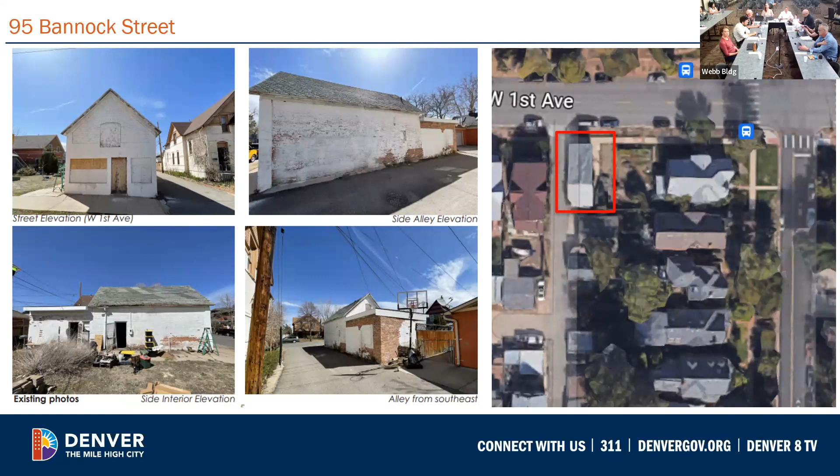All right, I will call the public commentary in order. The project before us today is 2023-LNDEMO-104 at 95 Bannock Street in the Baker District, and our staff person is Brittany.

Sorry. So our first item is total demolition of an accessory structure at 95 Bannock Street. You can see the property in question outlined in red. It is an accessory structure to 95 Bannock Street, and this structure does face onto West First Avenue.

Staff did feel that this structure had some historical significance, so we posted public notice of this demolition request on the property. The property was publicly noticed for demolition.

The accessory structure to the rear of 95 Bannock Street was originally constructed prior to 1893, as shown in the Denver Sanborn maps. By 1902, the structure was addressed 2020 Cherokee Street; however, the map does not note the building use. The 1911 city registry notes that the structure was used as a grocery store that was eventually converted into a clothing manufacturer use. By 1929, the Sanborn maps record the structure as a dwelling unit with a one-story attached garage, which is the current footprint base today.

The structure does encroach into the right-of-way along West First Avenue and the alley behind Bannock Street, as you can see in this aerial image here. The encroachment into the right-of-way is 8 3/8 of an inch along First Avenue and 3 1/2 inch into the right-of-way along the alley.

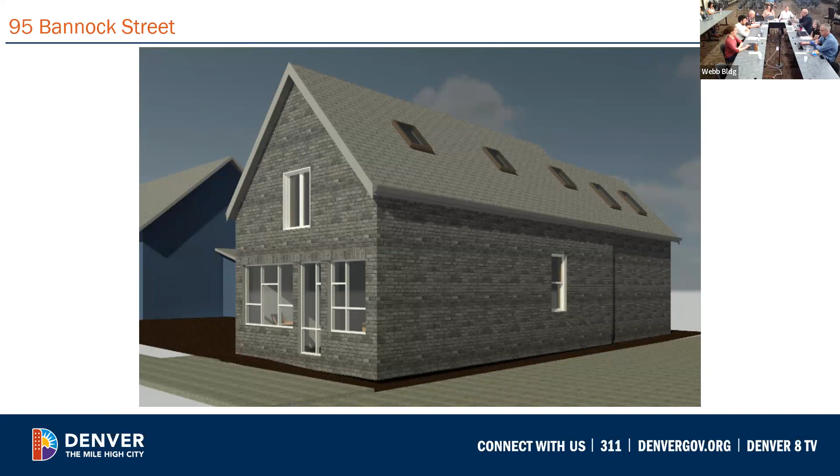So our first project today is for a new tandem house behind 95 Bannock Street. The new tandem house will have a footprint of 19 feet 3/4 inch by 44 feet and a total height of 21 feet 9 5/8 inch.

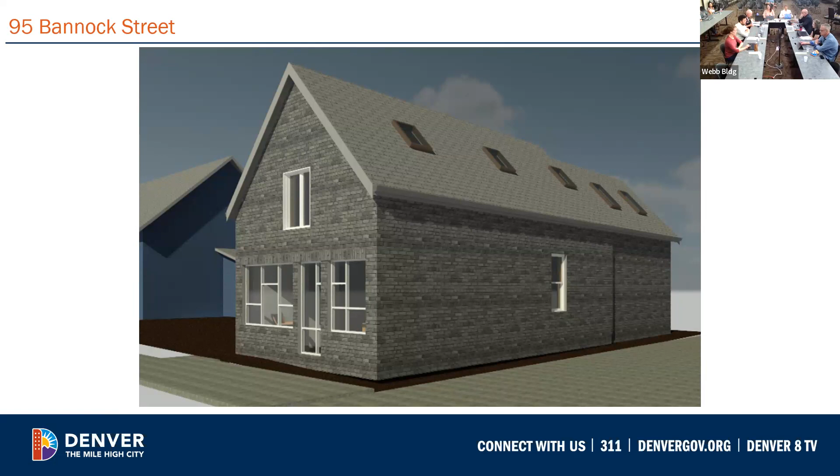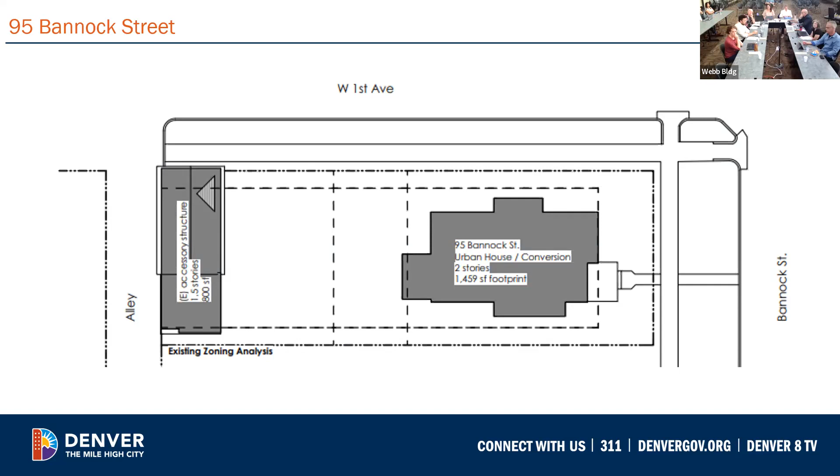So here is the proposed project. In terms of placement on the site, the new tandem house will comply with the required setbacks, so it will move the proposed tandem house out of the public right of way along West First Avenue and the alley.

So here you can see the proposed relationship of the primary structure to the new tandem house. This is the new tandem house here. The prior one was the previous site plan, so you can see how it will shift on the site. It is subordinate to the primary structure in terms of footprint. The existing home has a footprint of 1,459 square feet, and the proposed tandem house is 804 square feet.

So in terms of how the massing will shift on this site, the applicant has provided this very handy graphic. The new tandem house will be 1 foot 6 inches taller than the existing structure. It will move 3 feet 8 inches to the east. It will be minimally wider by 1 foot 6 inches. It will move back from West First Avenue 1 foot 8 inches, and then it will be 3 feet 6 inches shorter. So a pretty similar footprint, however, shifting the proposed structure on the site to comply with the required setbacks and current code regulations.

So the proposed structure will be a tandem house. It does have a living space on the ground floor with a bedroom and bathroom, as you can see here in this proposed footprint. The proposed footprint is somewhat similar to the existing footprint of the original structure that was just approved for demolition, because again, the applicant is trying to honor the memory of the prior structure. On the second level, there will be 2 bedrooms and 2 bathrooms, and then the roof will be a gable roof with a dormer on the east facade at the rear of the structure, and then skylights to provide lighting into the upper floors.

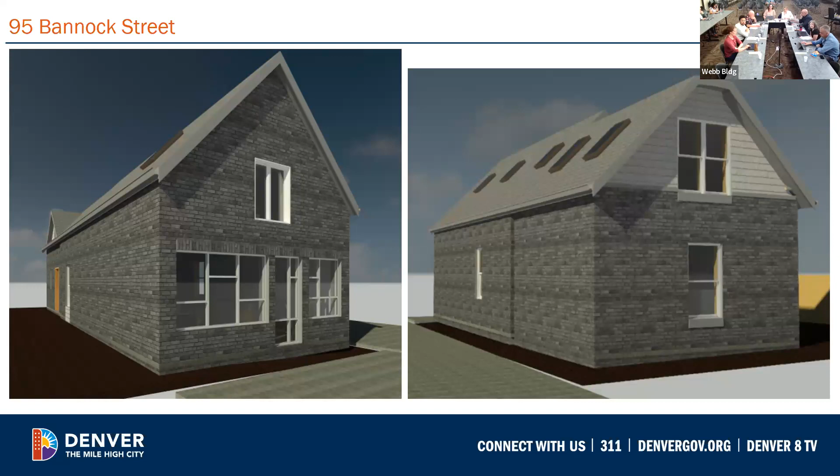So here are the proposed renderings. We will look at the phase 2 design details at a later stage, but we do believe that the structure will be clad entirely in brick, and we will look at what is in those specific openings at a later phase. Generally speaking, staff feel that the mass, scale, and form is appropriate for the Baker Historic District and is recommending approval of phase 1.

Brittany, thank you. Commissioners, any questions for Brittany? At this stage, okay, great.

All right, our applicants, Ozzy and Andrew, you're familiar with the game. Join us when you are able. There you are, say hi. Hello again. Ozi Friedrich, 528 West First Avenue with Radix Design.

So I think first I should clarify the situation with the zoning and the setbacks in the proposed design. The proposed design will include a setback encroachment on the First Avenue side, which, I want to call it the front, but since it's a tandem house building form, it's technically the side setback. And I expect we're probably going to be going to the zoning board of adjustment also, because I believe a tandem house is usually supposed to have its own off-street parking spot, which is not a part of this proposal and would not be appropriate in terms of the site layout and the history of the neighborhood.

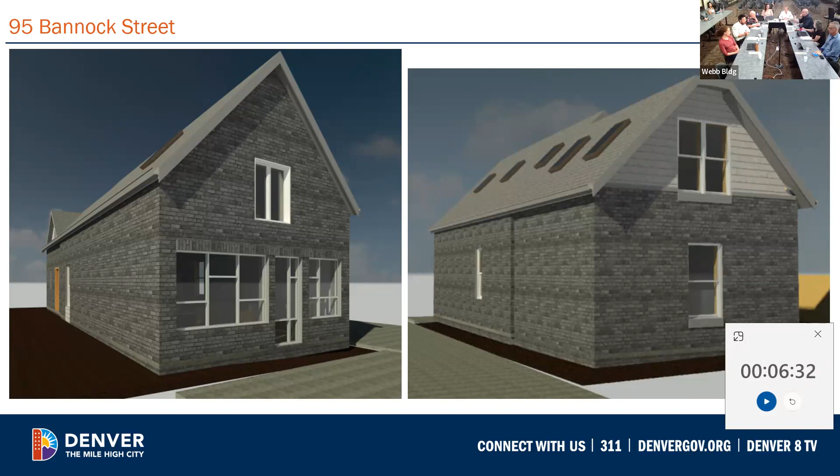Thank you. All right, gentlemen, commissioners, do you have any questions for the applicants? Just Larry, I have one question. Yeah, I'm curious with that north setback, what's the reason for having any setback at all?

That's a good question. I think we wanted to have it at least a foot off of the property line, with future sidewalk maintenance being a consideration, and if we were to look at having something like a stoop along the front of it, I think zoning would say that needs to be a foot off the property line too.

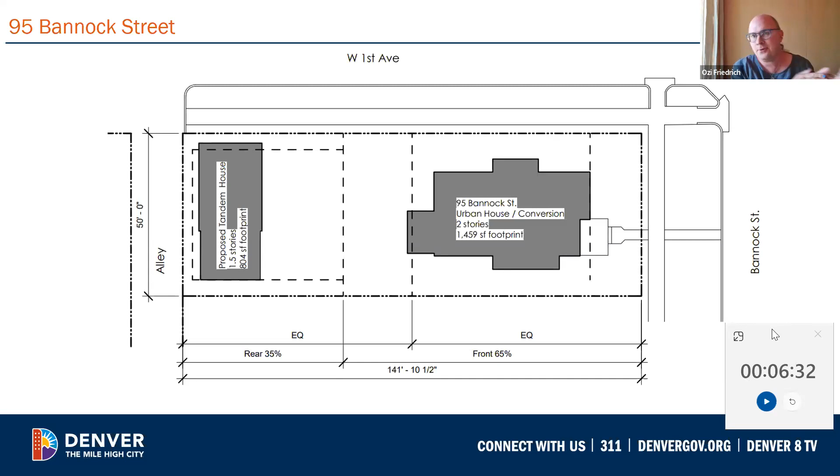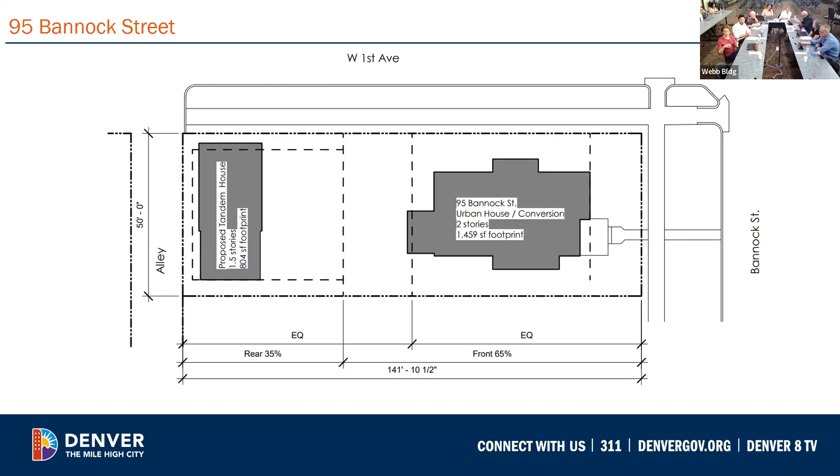Thank you. Erica has a question. With the rear portion that's evoking that original addition to the original building, I can see that the roof peak is clipped to keep it lower, and I know it's set back on the sides, but is the roof plane one continuous plane from front to back?

Yes, the proposal is that the 45-degree sloping roof planes are continuous front to back. I think the idea here is to express some subordination between the part that's recalling the original front and the part that's more like the original addition.

We looked at doing a full step down at the roof there, but the ceiling height upstairs is quite limited. So if you were to step down there and have enough of an offset for waterproofing, there's not enough height left for it to be an inhabitable space. So the clipped roof is kind of the gesture of subordination there, along with the inward step. Thank you.

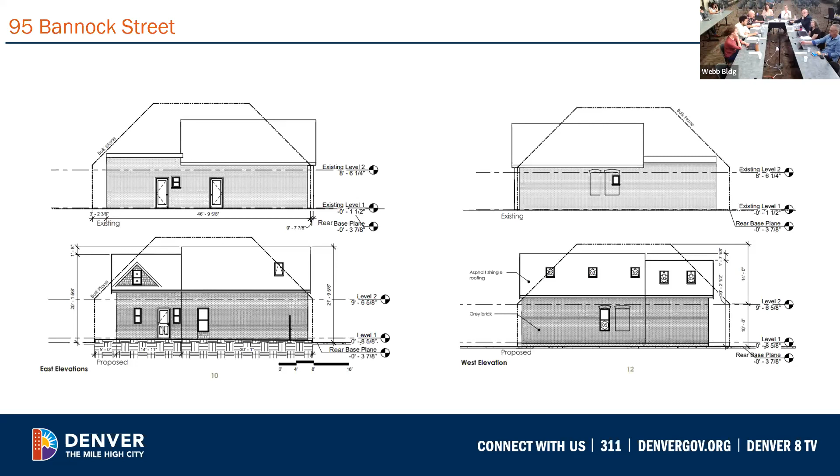Anybody else? Candace? I have a question about moving the front door. So on East First Avenue, are there other residential dwellings that have front doors on First Avenue?

I think the most typical pattern in the neighborhood is that the front door faces the street. There are examples of other properties in the historic district where the entry was moved to the side at a point in the structure's history. I can think of one in particular right now, though I'm not remembering its address.

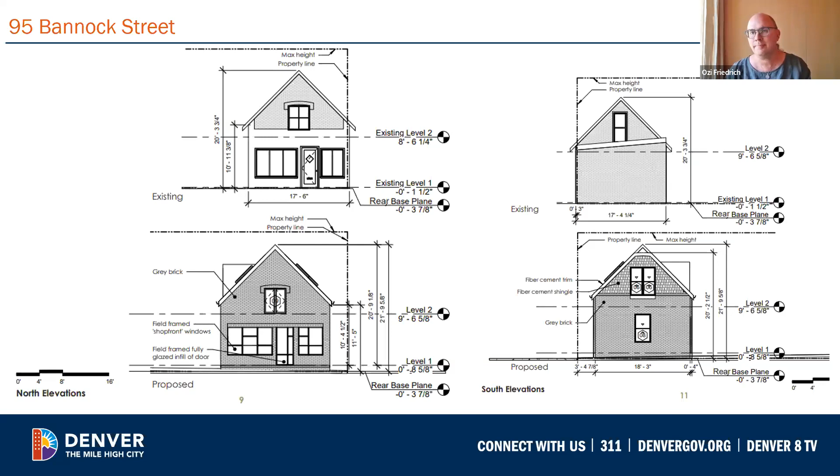Thank you. Okay, anybody else? All right, gentlemen, thank you very much. We'll move on to see if there are any people from the public that have questions.

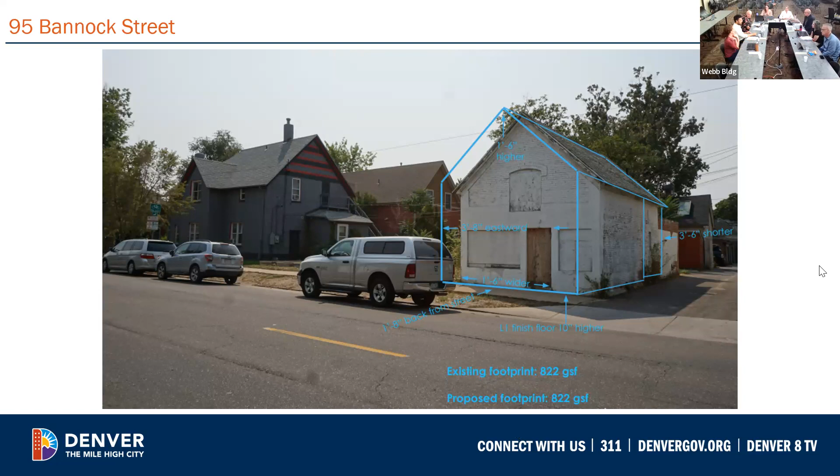That makes sense. I would just like to insert, though, that I would hate to see that window opening be shortened, or have two big picture windows on that facade. I think that would be detrimental to the rhythm of openings we're talking about here. So while I understand the oddity of the window/door, I think, at least in this context, it invites the question of why is that there — there's a story behind this, and what is that story? I feel like it at least invites some rumination about that, rather than just another new little house that looks different than the surrounding houses. It's better than a freaking doorway.

I think, as I understand the applicant's strategy, the pattern being followed is the historic building that was on site, and particularly the street facing openings are reflecting what was there. Otherwise, we would be comparing it to that set of houses on the other side of the alley in terms of context and pattern. But this seems like a very appropriate interpretation of the historic development pattern of the neighborhood.

So the thing that slightly compounds it for me is where the real front door is tucked way back onto the side of the site. It's not even on the alley side. It's a little bit odd because this is a structure on a main street where you can't really tell how you get into it, because the entrance is way in the back. That seems like not a typical organization of a little house like this.

You should see the house and see the entrance. So, maybe this is just a friendly comment, but the door—it took me a long time to figure out where it was, because I expected to find it at least on the alley side or somewhere visible from the right of way. Going back to guideline 4.2, it's an unusual organization of elements from what I can see in the neighborhood. I agree with the visibility of the front door concern.

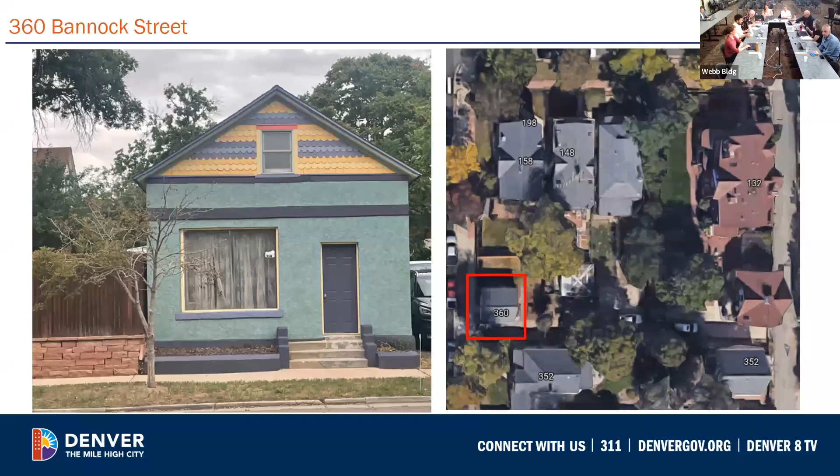The applicants will be working through staff person. Thank you very much. And now we are on to our next design review, which is also in the Baker District: 2023-COA-206 at 360 Bannock Street. And again...

So this is a tandem house conversion. This is an existing structure. We are not going to review this through the two-step process because it is an existing structure—they're simply changing the use and adding an addition to this. So while we typically review tandem houses through the two-step process, this is more a use adjustment to comply with the Denver zoning code, as this structure is on its own parcel, and you cannot have an accessory structure accessory to something when it's on its own parcel. Hope that all makes sense. But this will be a tandem house.

There are minimal changes proposed to the existing structure. The non-historic windows and doors will be replaced, and the majority of the structure will remain intact.

You can see this structure here on the aerial image. It is on its own parcel, which roughly matches the outline shown here. This is on Bannock Street and fronts onto Bannock Street, just up the street from the structure we just reviewed.

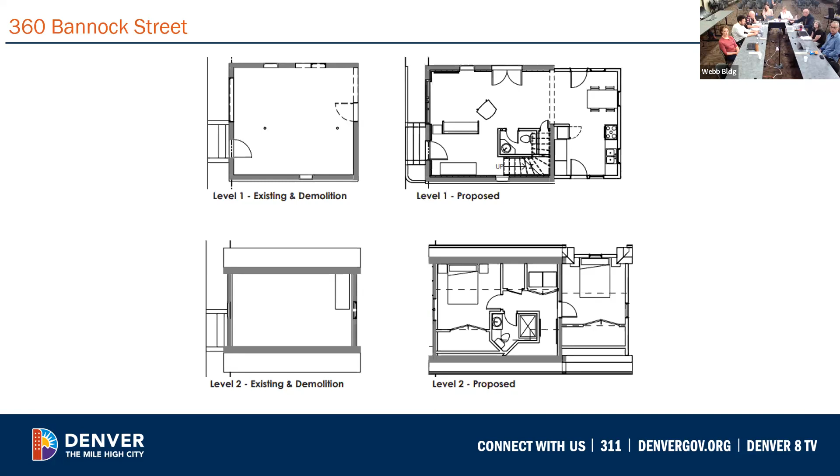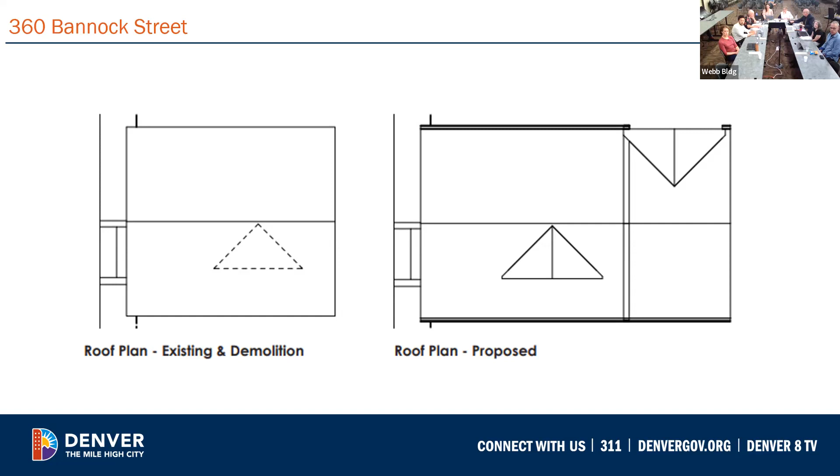To accommodate the change in use, the applicant is proposing a new dormer on the south roof slope, and the new addition will also have a forward-facing gable, similar to what we saw in the last project.

To add some use to this structure, the applicant is proposing to replace the non-historic plate glass window with a new framed glazing that will have the appearance of a double hung window, but it will be a single framed glazing unit giving the appearance of 3 double hung windows within that opening. Staff feel that is appropriate because, similar to the last structure, this structure has had a history of change of uses from residential to commercial and back to residential, so this preserves some of that history.

The existing front door will remain oriented towards Bannock Street. However, the non-historic door will be replaced with a new full lite door with 2 panels below, similar to doors seen within the Baker Historic District. In the gable face, a larger window will be installed to provide egress, and that window does have a double appearance.

At the rear, that new addition will be a gable on side gable addition, which you can see in this elevation here. So the biggest changes again are to the rear, as there will be a rear addition.

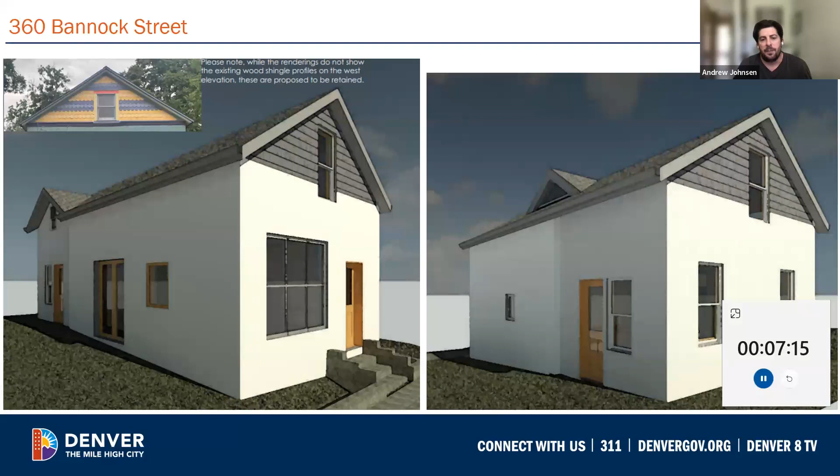And then on the south elevation, it's kind of an abandoned or vacated alley, and you won't be able to see that back entrance very clearly either. So I figured that might be important to point out.

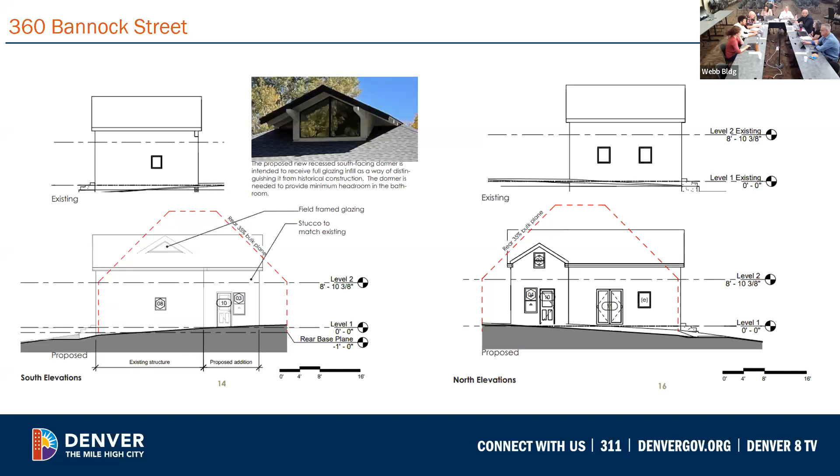I think it's a minor detail, but I think it's one that would help make the addition read as an addition. The southwest perspective on sheet 18 shows a continuous line, and I agree. I don't necessarily think the heights need to change, but that setback I think would be helpful. I guess the question is, we pointed out a guideline, and you could argue it doesn't apply.

Architecturally, I will just say that I kind of like it the way it's presented. It is simple, a little more of a contemporary interpretation of what an expansion would be within the historic district, but in my mind, one that's acceptable.

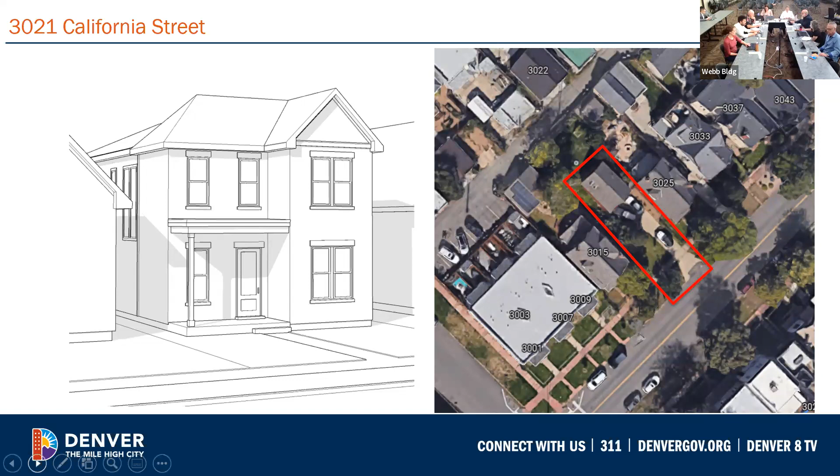So the proposed structure is for a new single-family residence with a detached garage structure. The primary structure is 2 stories in height, with a hip-on-gable roof form referencing some of the roof forms found on this block in the surrounding historic context. Initially, the applicant was proposing an Italianate structure. However, there are very few Italianate structures on this block, so staff did encourage a restudy of the form. There are about 3, including the Dr. Justina Ford House, which actually was moved onto this block, so it is not original, but we felt that to honor the history of the prior structure and the development patterns, a different roof form would be more appropriate. The detached garage is just a simple hipped roof garage.

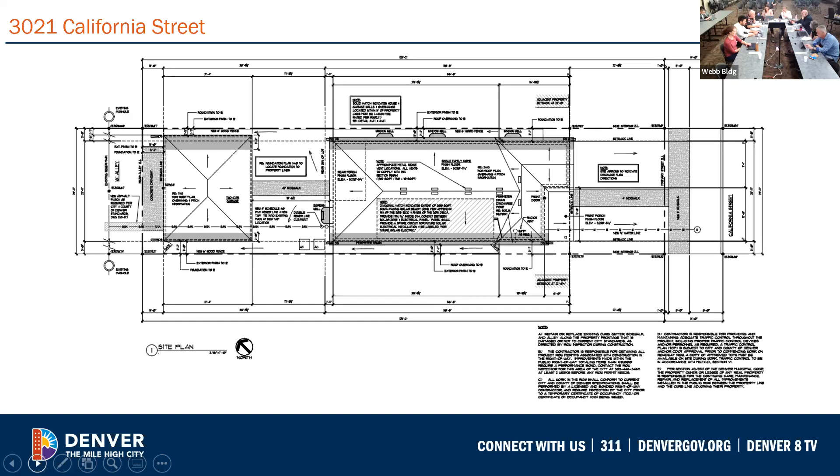The overall building footprint for this structure is 23 feet 7 inches, and it's 56 feet 2 inches deep on the lot, and it is 28 feet tall. The proposed garage is 25 feet by 21 feet and 17 feet tall.

In terms of the placement on the block, it is in alignment with the adjacent properties, which you can see here are generally setback from the public right of way. There are these structures here that have less of a setback, but generally speaking, the setback aligns with the adjacent property, and will honor that placement on the site.

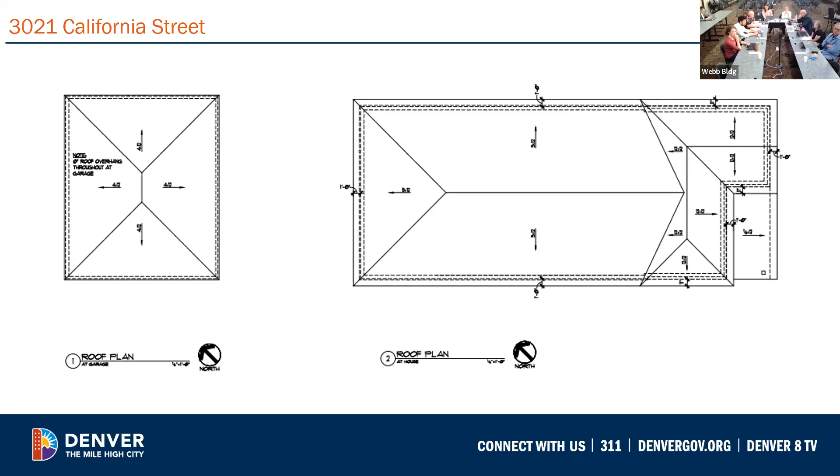Here is the proposed footprint. The structure will have a central entrance with a partial width side porch and projecting structure at the front. It will have an egress window on the front, so we will need to look at that closely in the design detail phase. It does have a basement, ground floor, and upper floor floor plan. Here is that proposed roof structure, mimicking some of the roof forms found in the surrounding historic context, which I do have images of to show you later.

So here's the proposed structure. Generally speaking, it is simple in design. The proposed structure is centered on the lot with 3 feet side interior setbacks. The proposal will have a significant amount of depth, but it is all within the front 65% of the lot, and the development is typical of the surrounding historic context.

The proposed structure will be set back from the property line and will feature a partial width porch on the south side of the facade. It is a uniform setback on this block. There is a 1.5 foot raised foundation proposed, and floor to floor heights are typical of the surrounding historic context, in which the ground floor is a little bit taller than the second floor.

Structures within the Curtis Park Historic District are generally very tall in nature and often violate the height and bulk plane for this district. This structure will again violate the bulk plane, but not the max height. The roof form was restudied by recommendation of staff, and we do feel that this roof form is appropriate, and the encroachment into the bulk plane is appropriate as well.

Here is the north elevation. The structure does have simple openings that are a little bit wider than they are tall, which is atypical of what you see with Curtis Park's tall, narrow window openings. However, as these are on secondary facades, they'll have minimal visibility. Additionally, the 2 sister houses that sit at 3015 and 3025 actually have wider windows than taller windows. They have more of a classical architectural vocabulary. So we do feel that this is fitting in with this block in terms of the window openings.

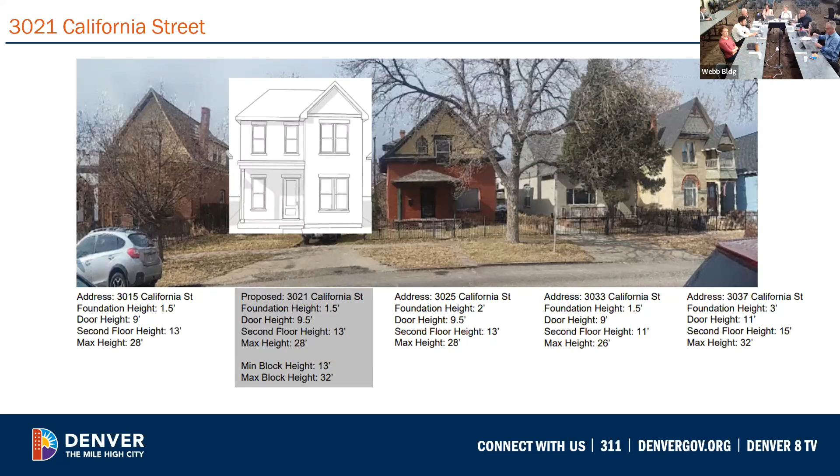Both have partial width porches located on the south side of the property and more centrally located entrances. So we do feel that there are parts of this building form that are indicating the original structure while remaining identifiable of its time, and in terms of how it fits in with the surrounding historic context.

So there are a few of these hip roofs within the Curtis Park Historic District that are truncated in nature and don't come up all the way to a full pyramidal point. They are typically one-story structures. The applicant here has put in two on Stout Street, but there are several just north of this property with this building form. And 2921 Stout Street has a similar building form, and this is a historic structure within the Curtis Park Historic District.

So while this is not a roof form that we typically see for Curtis Park, we do see a lot of Italianates in Curtis Park. We do feel that it is appropriate for the district and does contribute to the variety of development patterns that you see within Curtis Park, and it's kind of nice to see just a different roof form for Curtis Park.

So we are recommending approval of the phase 1 mass form and context for this site, as we do feel that it is compatible with the surrounding historic context, and are also recommending approval of the administrative adjustment for the bulk plane encroachment. Brittany, thank you.

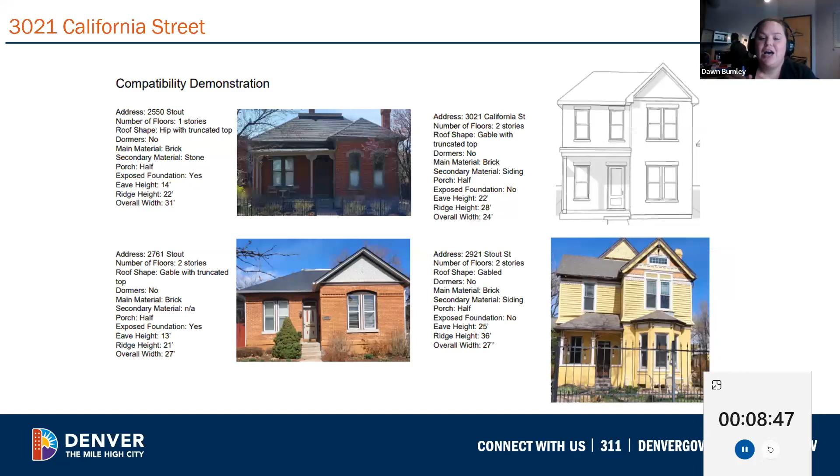As far as other details, we like that gable end on the front - we feel like it plays off some of the neighboring houses. If you look at page 20, the compatibility demonstration sheet, we felt like these neighboring residences really showed that centralized front door, the gable end at the front, splitting up the massing so it was less symmetrical, more asymmetrical, to fit in with these other neighboring structures.

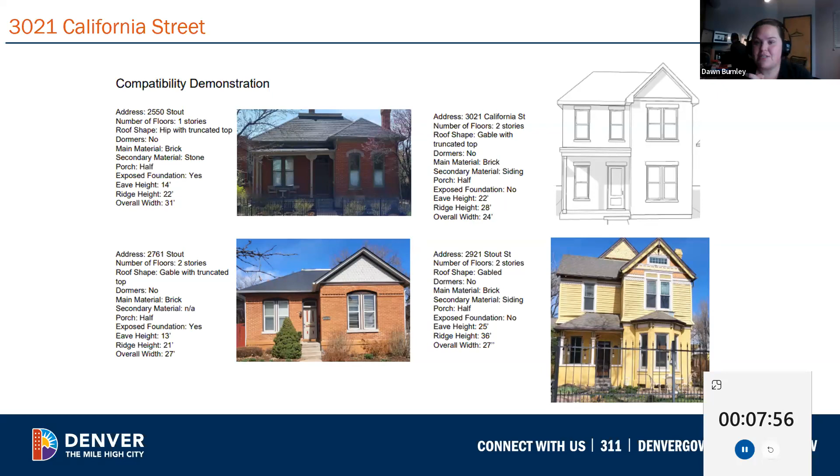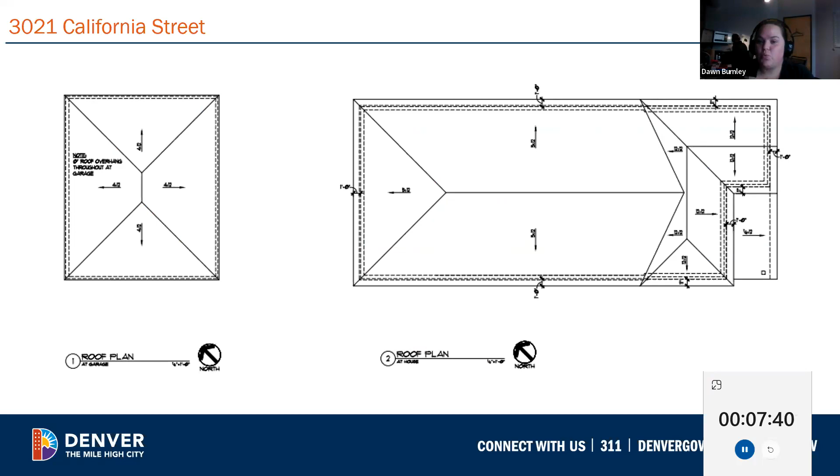So we also felt it was really important to get a little bit of a higher roof line to go with this massing form. So we have the 10-foot ceiling heights on the first floor, 9 foot on the second floor, with a 12-12 pitch there at the front. We decreased the slope of the roof in the back so that we could give this look of the steeper roof line, which seems to be more in line with that style of house. So that was important to us, and that's why we're asking for that adjustment for the 1 foot 11 inches, an additional height there at the bulk plane, but not overall.

The windows on the side of the house aren't very visible at all. From the very front facade, they start at 17 feet, 8 inches back, and from the facade where the front door is, it's still 11 feet, 8 inches back. We tried to locate them just past the break line of the brick, so it seemed like a logical point. We really don't feel like they're very visible.

The majority of the windows on the house are 2'6" by 5'6" on the second floor and 2'6" by 6 feet on the ground floor. Those two side windows are 2'6" by 9 feet, so while they are significant, they are larger, but we don't feel it's as significant as some of the larger stairway windows you see around. It would be nice to get that additional light in on that side of the house, given that this is a narrower lot.

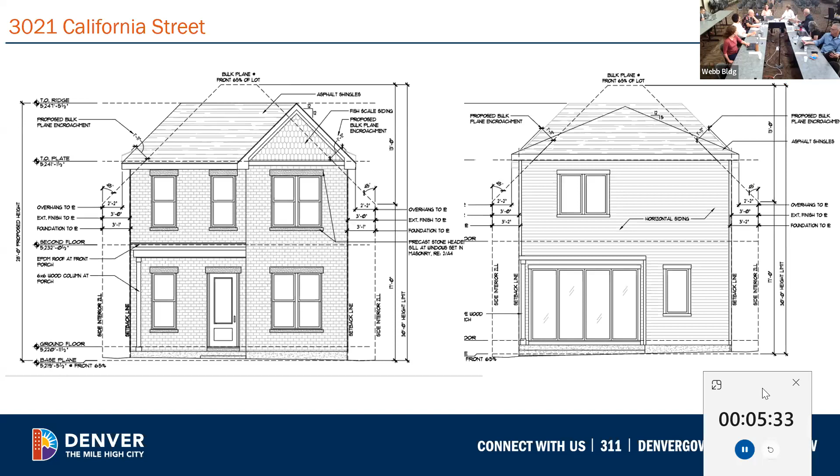Okay, great. My name's Andrew Arata, 1836 South Marion. I actually lived 3 blocks exactly from California Street. We built 9 years ago at 2725 California Street, but we've since moved down to DU, so coming back really close to where we first built.

The only comment I'm going to add is we will not have waterproofing details issues because there are several DHA lots, 2 that I know of that I walked, that have terrible waterproofing details, but we won't have them. I think I'm never going to do fluid apply and recessed windows for the siding because I have seen that leaking water issues. We don't plan on that problem.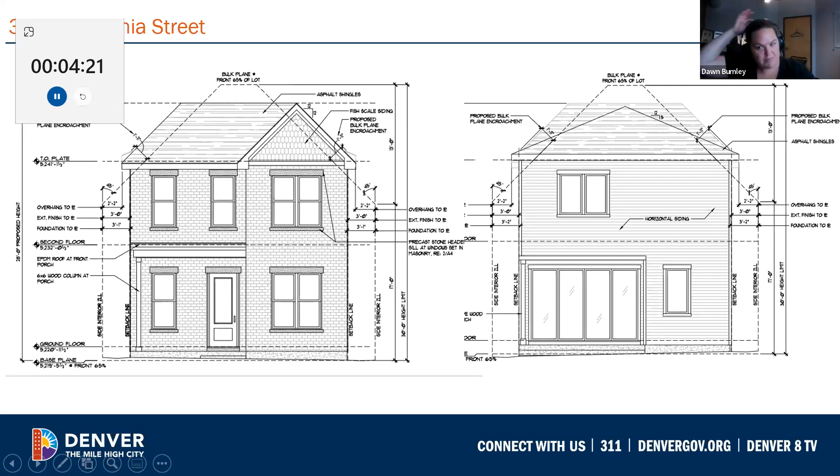Can I add one thing? I may have misheard this whenever Brittany was presenting, but I believe she said there was an egress window on the front of the house that we'd need to address. There isn't actually. There's one at the rear of the property, and then there's 3 at the side. I just wanted to point out that the one you see at the bottom of the sheet is at the back of the property, at the right back of the house.

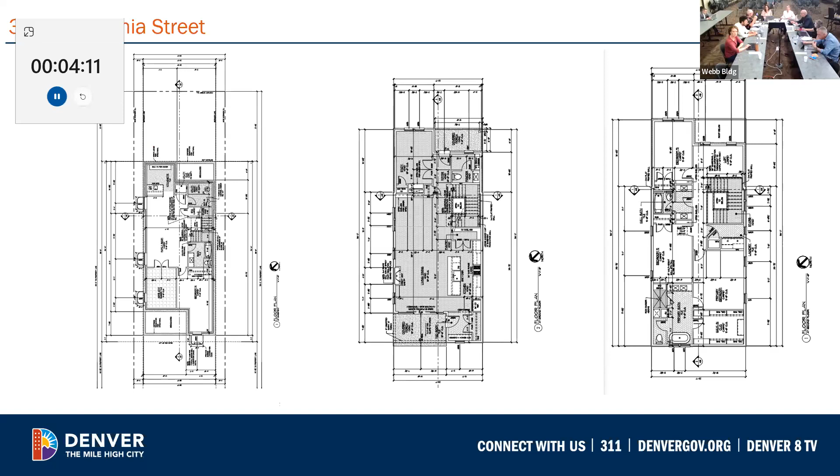All right, commissioners, do you have questions for the applicants?

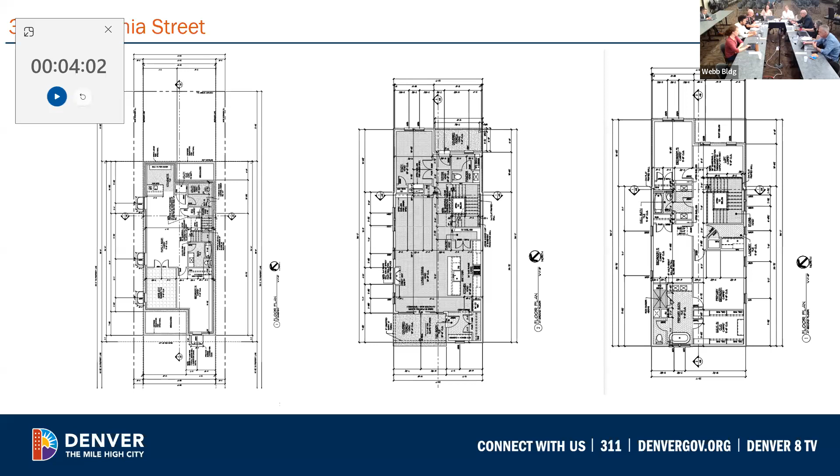Larry? No? Nick? Yeah, you talked a little bit about the stair window and its oversized proportion. I'm not the window expert on the commission, but to me, just visually, it appears more like a sliding glass door proportion than a window to an open stair proportion, and so I found it a little confusing. But that's just a comment, a question for my fellow commissioners when we go into discussion.

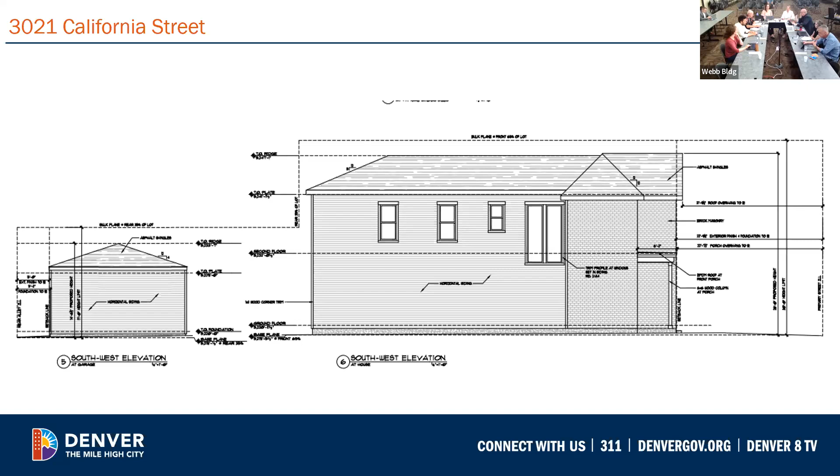Any other questions for the applicants? Okay, all righty, thank you very much. Thank you.

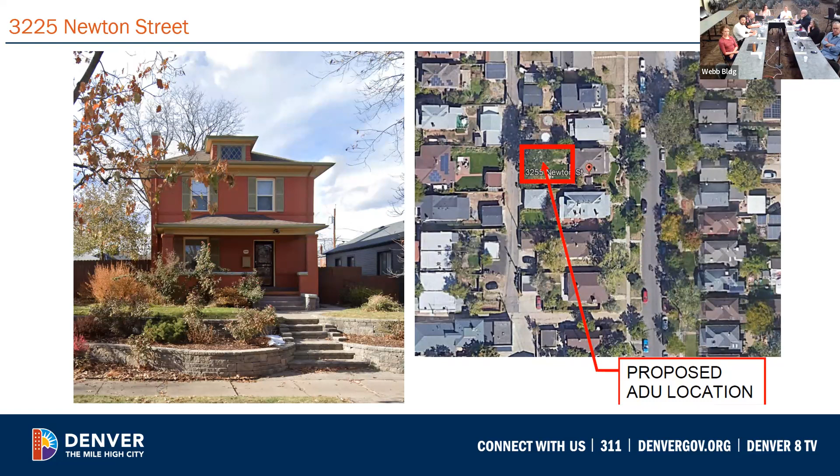The commission has reviewed an accessory dwelling unit structure at this site previously two times. The first submittal was in June of 2022, and the commission had concerns that the proposal was too much programming for the site. At the time, the applicant was proposing not to demolish the existing garage structure and instead construct a new accessory dwelling unit adjacent to the garage on the south side of the site. The commission again expressed concern over programming at the site and also the roof form of the proposed accessory dwelling unit, which was a gable roof structure.

Then in January of 2023, the applicant returned with similar programming, with the garage still intact and an accessory dwelling unit on the south side of the site. However, minor revisions had been made to the overall form to have a hipped roof form to better match the primary structure, along with some design details that felt more similar to the primary structure. Staff did actually recommend approval of that submittal. However, the commission still expressed concern over the overall form and programming for the site and ultimately denied that request.

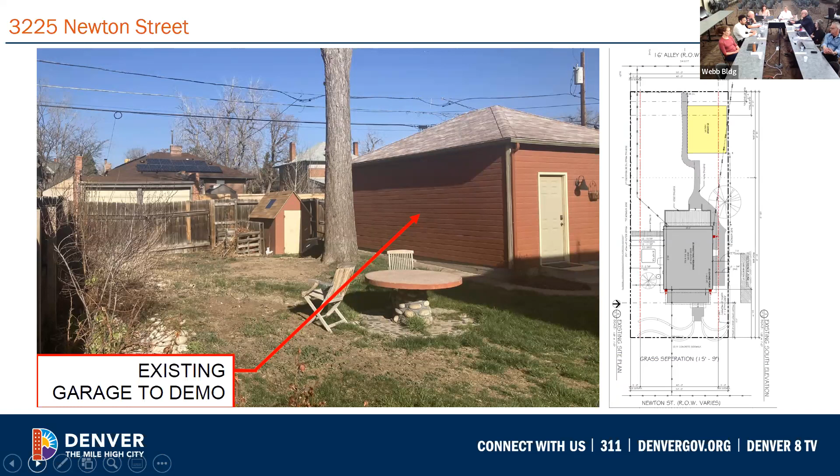So now the applicant is back with a submittal that involves demolition of this garage structure. Here is the proposed accessory dwelling unit. It will be 24 feet in height with a footprint of 25 feet 5 1/4 inches by 35 feet 5 inches. This footprint is very similar to what the commission saw previously. The major difference is the placement and orientation on the site.

This will be wide along the alley, whereas the prior submittal had significant depth along the north-south property lines. And again, that garage is now demolished, allowing much of the accessory dwelling unit massing to be placed behind the primary structure. However, some of the accessory dwelling unit will be visible on the north and south sides of the site. You can see these red lines in the site plan image showing the accessory dwelling unit alignment with the primary structure.

In terms of the footprint, the proposed accessory dwelling unit is 842 square feet, and the existing single family dwelling unit is 803 square feet. So the overall footprint is similar to what the commission saw previously.

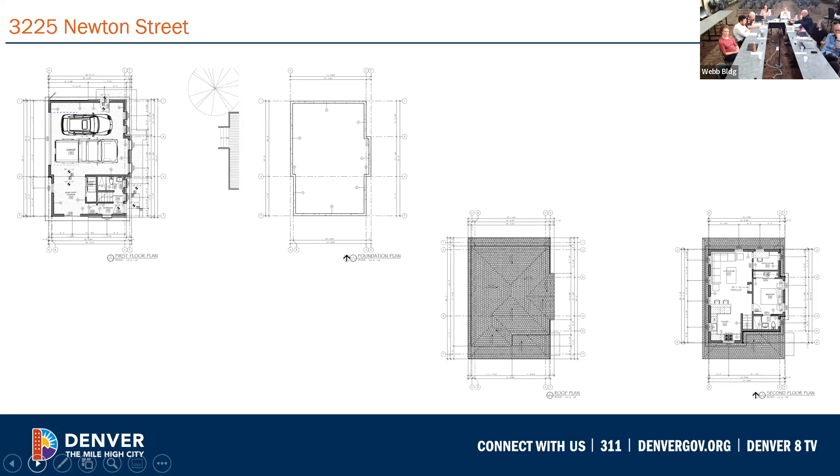That projecting gable is to accommodate a larger vehicle, as you can see in the first floor plan. The storage and entry space is limited to the ground floor. But to enlarge the kitchen a little bit more, there is a cross gable form also proposed on that hip. So again, a complex roof form as compared to the primary structure.

The applicant did simplify the roof form a bit over the porch entry to just have the one slope. But again, this is where that roof form is visible from the public right of way, and it's where this ADU has the most complexity. So staff do have some concerns over that.

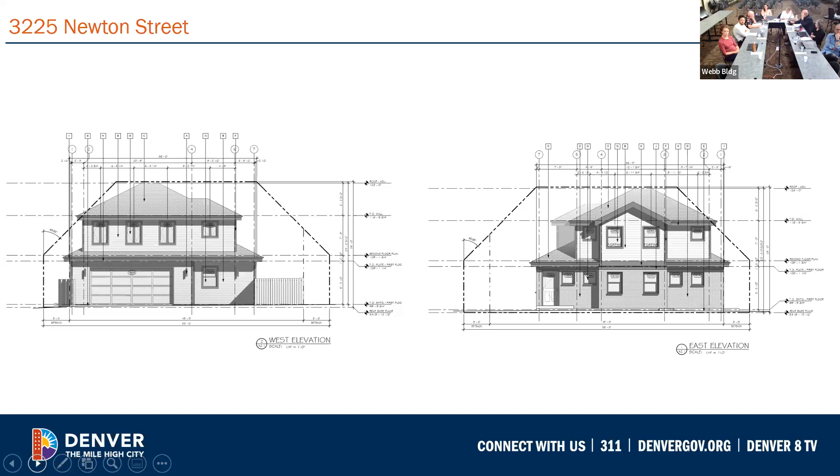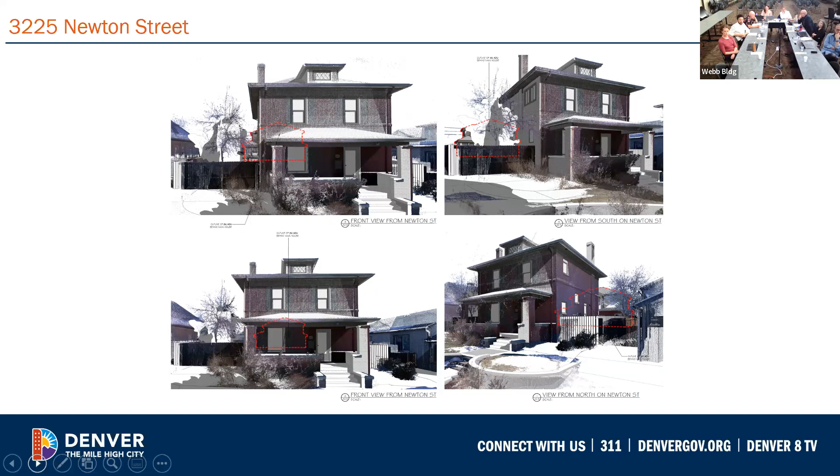As you move around the site and walk along the sidewalk, portions of the ADU will disappear behind the primary structure. However, generally speaking, staff are very concerned that this form is not appropriate for the Packards Hill Historic District and is not representative of the accessory structures you would see there.

So while we feel the applicant did make a number of improvements to this design, the overall form is not contextual to the Packards Hill Historic District, and therefore we are recommending denial of the submittal at this time. Just because we have concerns over its relationship to the primary structure, the surrounding historic context, and the overall programming of the structure and how that affects the exterior expression of the structure.

Thank you, Brittany. Commissioners, do you have any questions?

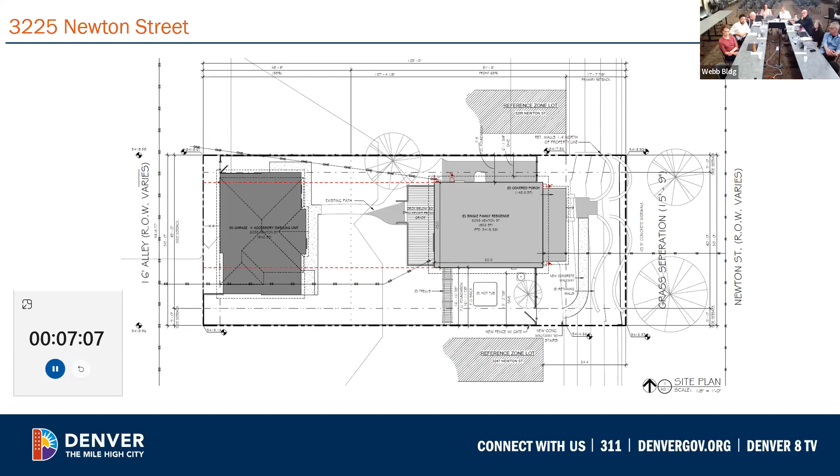Also, the entrance to the ADU is within that single story, which is in context and part of the guidelines in terms of having that face the main street. The ADU's proposed height is below the max height for zoning and is 3 feet lower than the existing primary home, making the ADU subordinate in height. The location of the ADU maintains open space in the backyard, consistent with neighborhood building placements, as well as extra space along the south side.

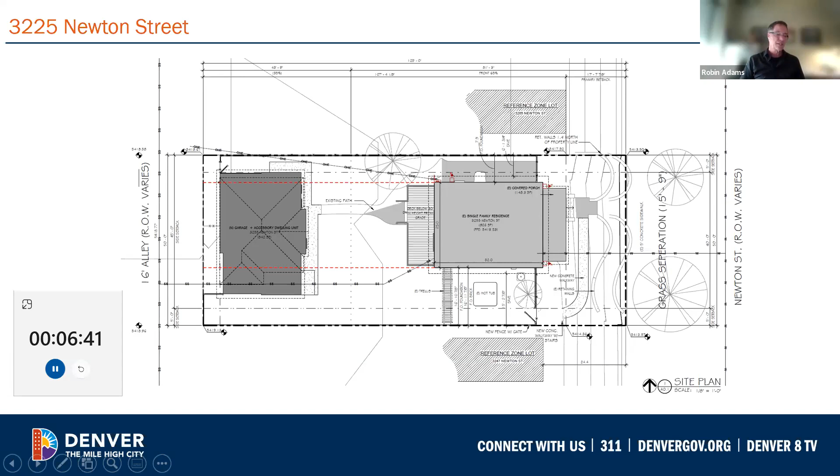So we feel we're preserving that character of open space and open land. Overall, the footprint of our ADU is 842 square feet. The house, if you include the porch, is actually 951 square feet. The porch itself is 148 square feet.

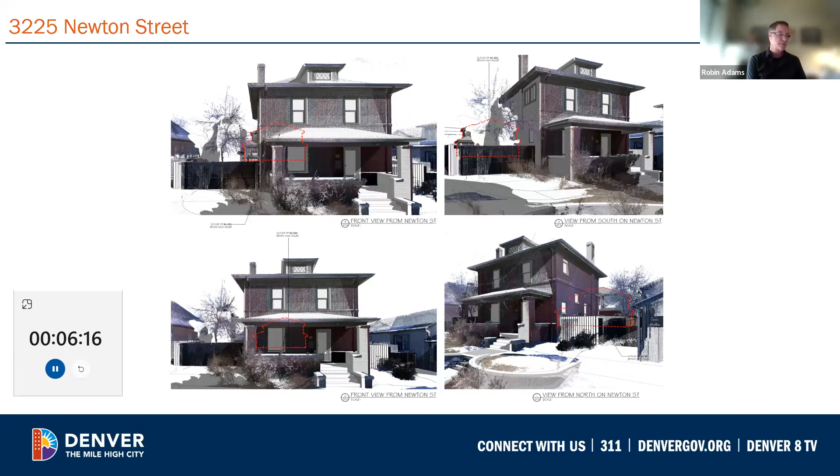The building footprint is 804, so the reasonable footprint is slightly smaller. The window proportions and geometry are like those within the existing primary home.

Double hung windows are proposed for the walls facing the street. As Brittany noted, the exception are the slider windows facing the alley. But if the commission were to ask us to make an adjustment to that for the approval on condition, we would be more than happy to oblige.

The proposed materials will be a combination of brick on public facing elevations at main level to relate to the principal materials of the primary structure. And then for economy and simplicity, the remainder of the building will be clad in horizontal 4-inch siding.

Again, we could go to a simple horizontal siding throughout, if that's the commissioner's viewpoint. But we thought the dual materials and conversation between the existing brick and the new brick would be a good architectural move.

Finally, we look at this as an architectural style that is a simplified Queen Anne Edwardian characteristic, where Queen Anne has that primary building mass, hip roof with projecting pediment bays on the front, and then often has a lower, smaller subordinate massing to the side. Now, definitely an interpretation, it's not a strict one, but the strict interpretation wouldn't really be permitted. And then that's about it.

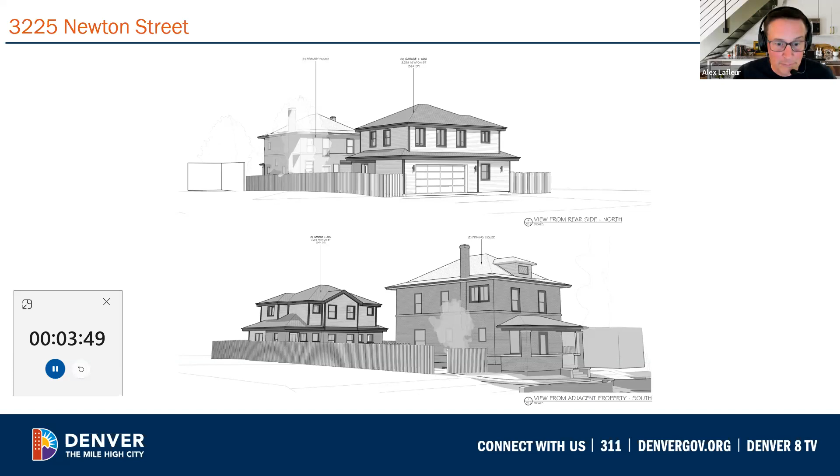That's really the only point I wanted to make. And I obviously support Robin and all these decisions that we've made along the way, and feel that this matches the context of the overall neighborhood.

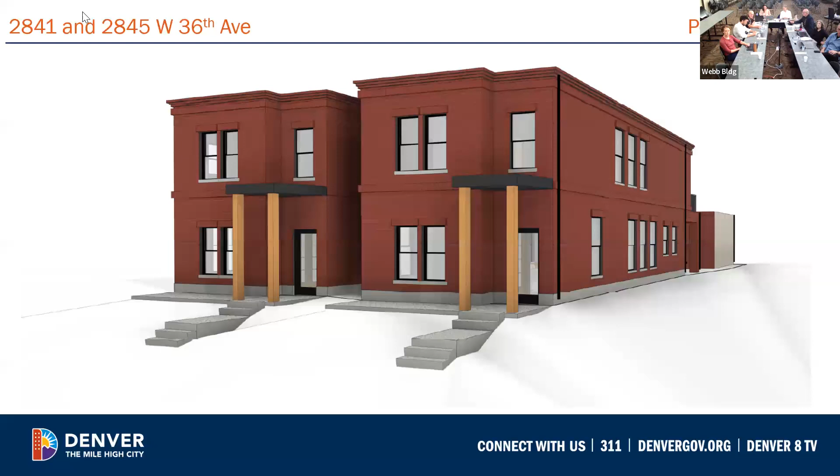So here you have the proposed renderings for these projects. These will take the place of a non-contributing structure within the Potter Highlands Historic District. They are single family homes that are mirror images of each other. In terms of this development, it is a two-story development on a block that is lower scale in nature for the Potter Highlands Historic District.

However, the commission approved the phase one mass form and context on February 7th, 2023, and there have been minimal changes to the mass and form. Actually, there have been no changes to the mass and form other than a change to the porch height, in relation to a comment provided in phase one that the floor to floor heights needed to be articulated to be more similar to, or give the appearance of being more similar to, the surrounding context. So this was the mass and scale submittal for these.

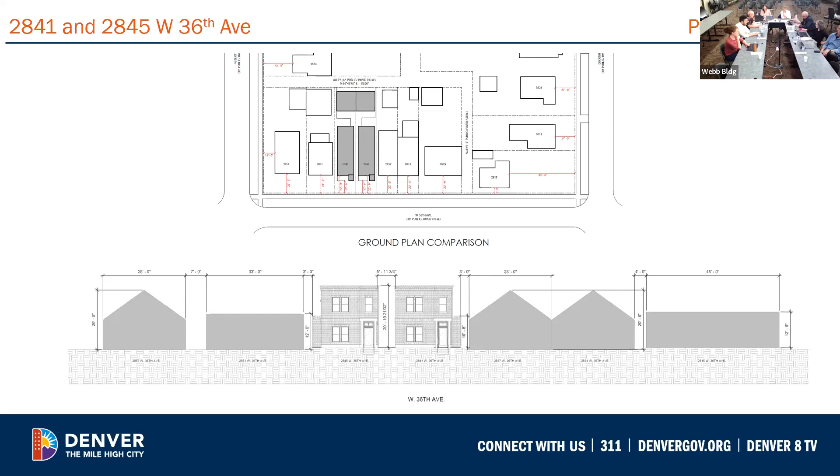Staff felt that the second floor read a little bit taller than the first floor, so the applicant adjusted that design to raise the string course on this proposal. Staff do feel that the string course placement, as you see in this elevation, is more appropriate. However, with the adjustment of the string course height, the applicant did raise the porch ceiling height, and we would recommend that the porch ceiling height be returned to the prior design, where it just landed right above that transom window. Generally speaking, we feel the mass and scale is still appropriate for the structure, however the porch does need to return to its prior design.

In terms of the design details, this is a brick clad structure. It will be clad in red brick with buff mortar. There is a soldier course header detail above the windows, a soldier course header detail at the building cornice, and a stepped brick parapet detail. Generally speaking, staff do not have concerns over the design details. However, there are some inconsistencies in the applicant's submitted plans that are not calling out the correct details. For instance, this notation here for brick soldier course is not indicated in the right location based on the elevation design.

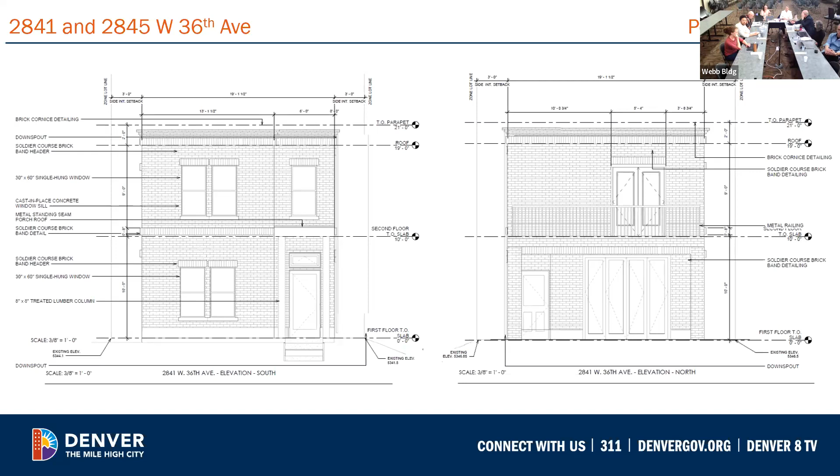For the rear elevation, there will be a metal railing at the back for that second floor balcony. There are also some inconsistencies here in terms of the door design and door functionality, so we would also ask for clarification there. But they're generally minor in nature, relating to the man door on the ground floor, which will not be very visible from the public right-of-way. So just some inconsistencies with the application materials.

In terms of elevations, I have 2841 West 36 up here on the screen. However, 2845 West 36 is a very similar design because they are mirror images of each other. The primary structure will be clad in brick, a standard size brick that will wrap the entirety of the facade. The garage structure, on the elevation fronting the primary structure, will be clad in brick, and then it'll transition into a lap siding material on the secondary and alley elevations.

Staff feel that is appropriate for a secondary structure, as we see a number of new accessory structures that do have that detailing.

The windows again here, you can see that header detail proposed and that concrete sill detail proposed. They are single hung fiberglass composite windows, which is Fibrex windows, which have been approved by the commission for new construction. In terms of the front porch design, it has a

8x8 wood post and a metal canopy with a standing seam roof, which you can see in this section detail here. The rear balcony is shown in section here, so it will have a brick column support and then a metal handrail in black.

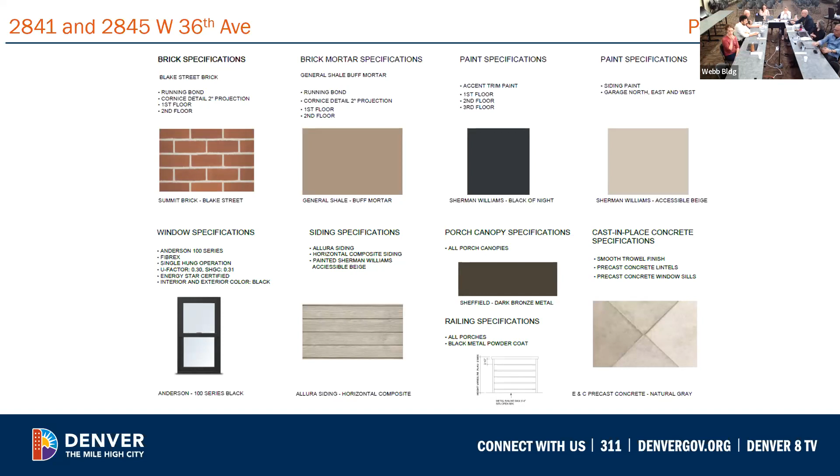And then here you can see that precast natural gray color that I believe is proposed for the window sills and those Fibrex windows. So here are just some renderings of that proposed project, looking at 2841 on the left side of your screen, and then looking at 2845 West 36 on the right side. The garage structure will have an outdoor fireplace detail that you can see in this rendering here. It's not visible from the public right-of-way, so we don't have major concerns over that.

But generally, we are recommending approval of this project with some minor conditions: return the porch height to the prior height shown in the phase 1 submittal, confirm the siding finish for the lap siding on the garage, and correct inaccuracies in the submittal materials.

Brittany, thank you. Commissioners, questions? I had one question about the garage doors. I didn't think I saw them. And that would be something that we should have, correct? That was probably something I lumped into inaccuracies in the drawing submittal materials, but you could be more specific if you felt like.

I'll probably just run through this pretty quickly. I think Brittany covered just about everything, and we agree with some of the minor adjustments that need to be made. A lot of them seem like annotation and maybe some graphic issues. So maybe we'll just run through this so everybody can get going.

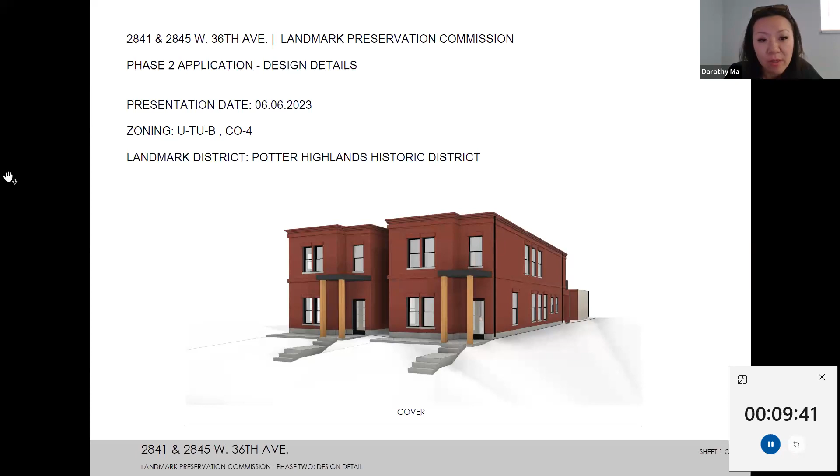All right, next page please. As Brittany mentioned, it's 2 single-family projects, but they're essentially identical and separated as 2 lots. As she recommended viewing it as one, we're fine either way, so however you guys want to approach it. I know at building permit it will require 2 separate permits, but essentially identical in design.

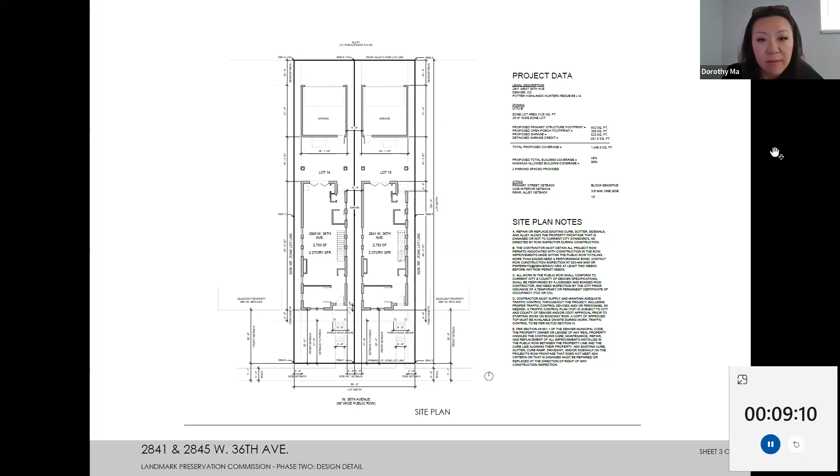Next page please. I think just confirming some of the inconsistencies that Brittany mentioned: yes, it is a concrete sill, and yes, there is a soldier course and the rowlock. I think it's just a graphic arrow pointing issue - when we adjusted the height, some of those didn't get moved to exactly point where they need to. Same with the transom - the front door should have a transom above, it seems like maybe it's just a graphic error we missed as well.

And we are fine with the recommendation that Brittany suggested with returning the porch height back to what we had previously. That's an easy adjustment on our end, and shouldn't be an issue for us to make as well.

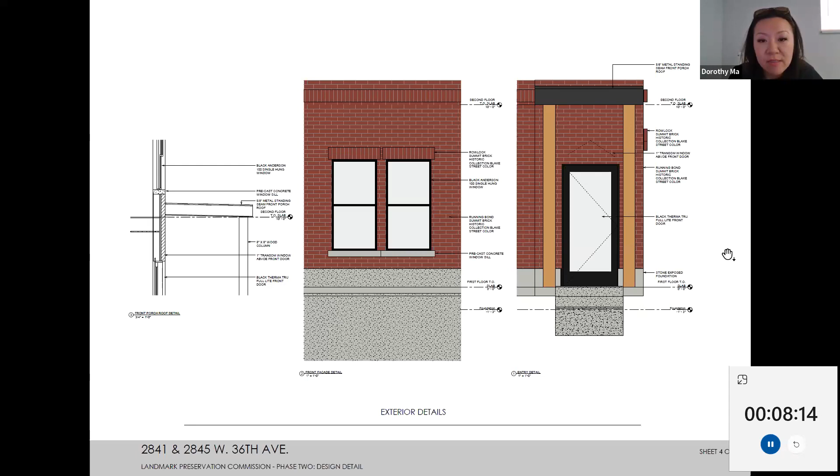Next slide. Some of these details, as she mentioned, just the running bond at the cornice at the roof, and some of the brick details that we talked about. Next slide please.

I think the one thing we do want to mention is that we've had a preliminary review with zoning separately just to look at the overall, and we ran into a lot coverage issue. So we are proposing that we reduce the width of that rear balcony - the middle balcony section. I believe currently it's 5'4" and some change, and we're going to reduce it to about 3'9". Design and everything stays the same, it's literally just the width. Also that fireplace feature, we are hoping that might have to go away. Brittany, I don't know if that's a conversation we need to have in terms of the submittal, but it just puts us over the lot coverage, and we wanted to make sure that we are within the lot coverage without affecting the overall characteristics of what Landmark has already approved and is looking at currently.

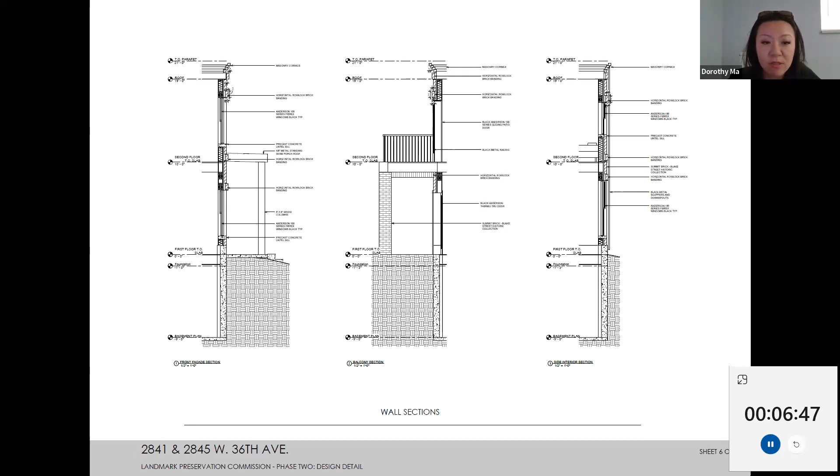So next page. Some of these drawings and sections showing the brick detailing and then the window types as we talked about. And again, we'll go through and make sure the annotations are at the right locations on all the color as well as the black and white drawings.

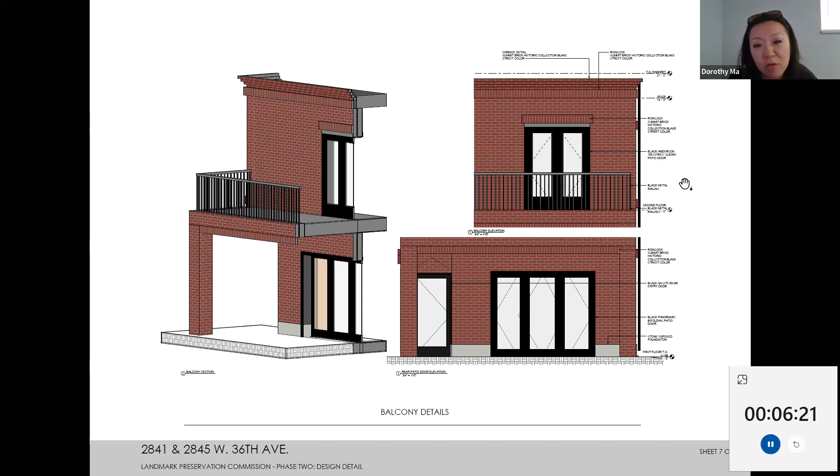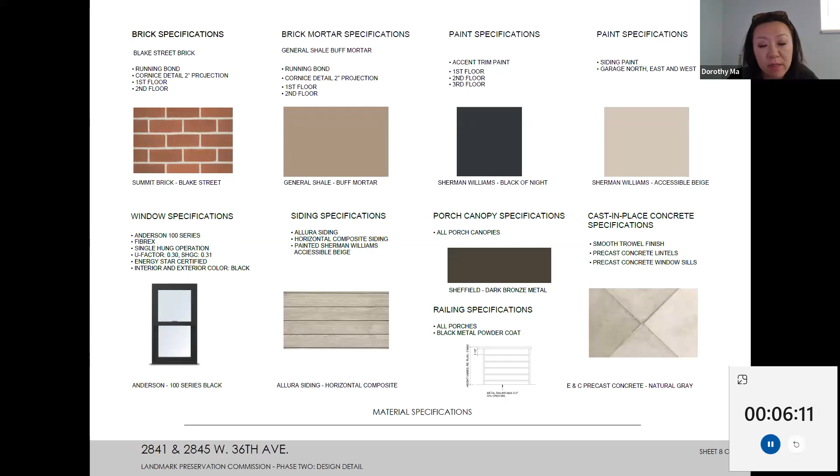Yeah, if you want to just kind of flip through these. I think Brittany already did a pretty good job of going through the materials palette, so I'll just hand it over from here and see if you have any questions for us. But we are fine adjusting per the recommendations that Brittany mentioned, and then just correcting any of the inconsistencies in the drawings as discussed.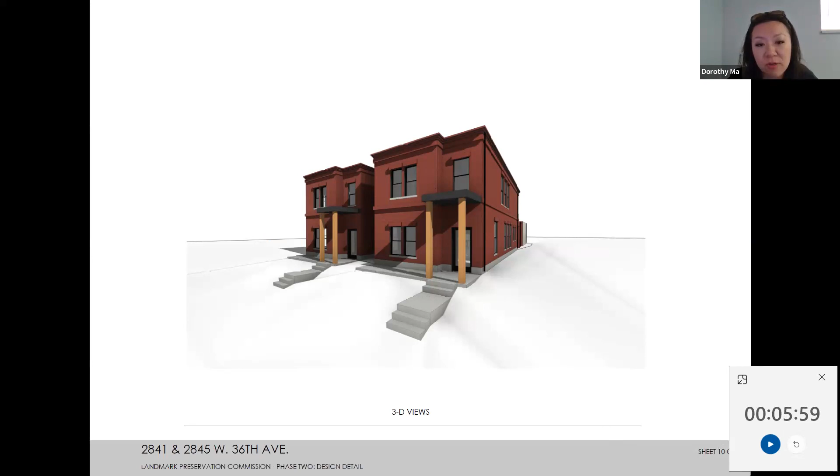On this cornice detail, and it looks like also on some of these rowlock details, the brick projects 2 inches from the main brick veneer. As far as I understand, going much past an inch is not generally recommended. Is there a particular way you're planning to achieve that? No, and that might just be a graphic, because we have an L angle shown, so it probably is just graphic. It doesn't say 2 inches, so it probably needs to get adjusted to an inch. Okay, thank you.

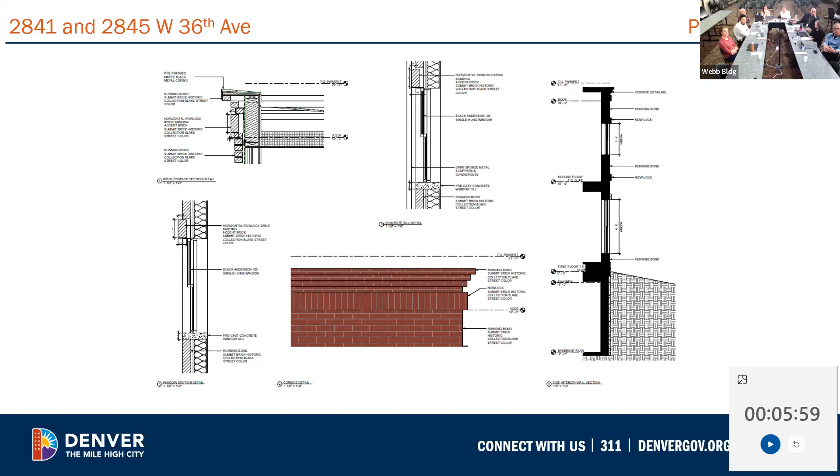Any other questions? In the prior reviews, did anybody discuss the roof for the front porch, the entry? In what capacity, can you elaborate? It's drainage and roofing material. The standing seam, I think, is that what's proposed on top? Standing seam metal, yes, but it's virtually flat. No, it'll have a 1/4 inch per foot slope. Yeah, I don't know if there's a roofing manufacturer that will warrant that.

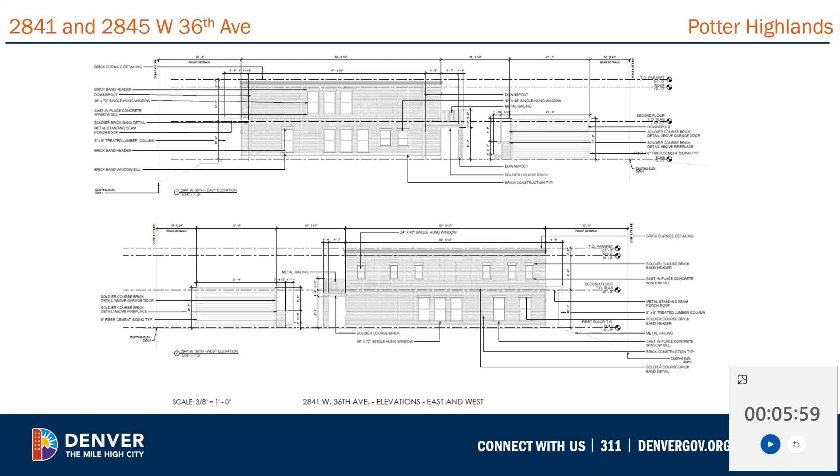That's a technical issue or a friendly comment. And then there's no controlled drainage, it just flows onto the entry sidewalk. No, we do have, so Abby, we do show, I have Abby on here. I don't know if our site plan shows where the downspouts come down, but we do have downspouts, maybe in the southeast corner there, and I think it just connects into the downspout that comes from the second level.

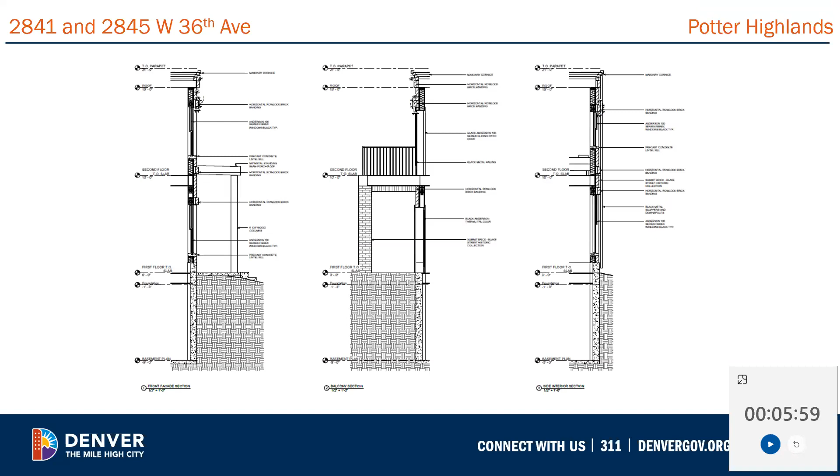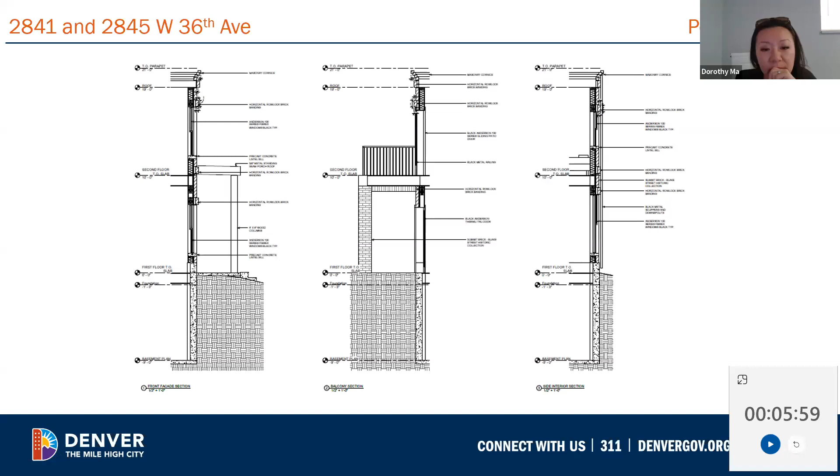Yeah, maybe not in this particular drawing. So there's a gutter across the front, and then a downspout down the post. It is essentially a downspout along the building, right, Abby? That kind of, or yeah, that's correct. Or maybe it's down the post. Can you go to the... I don't have all the pages on the commission, but the commissioners have the plans. It should be visible in one of the 3D views from the southeast, I think.

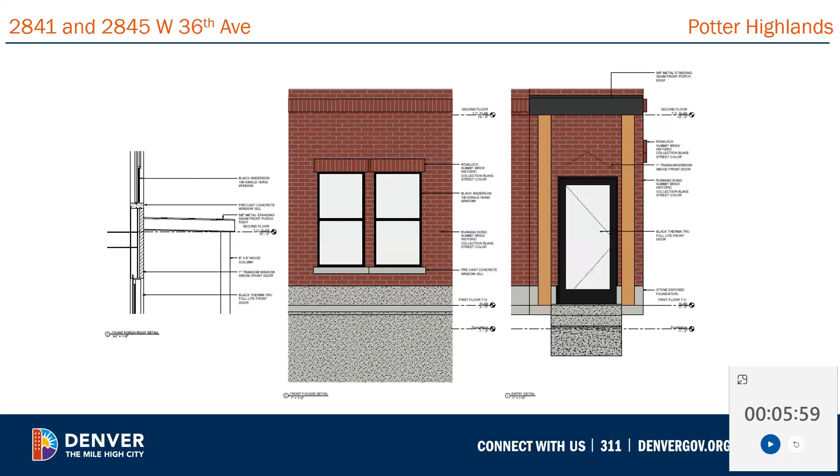Yeah, so typically we'll do an internal drain, so it's not an exposed gutter along the fascia when we have a roof like that. So it's an internal drain that then downspouts to a spout that probably returns back, so it's not coming down along the post, but along the edge of the building. We can send you that detail or draw it out in more particular if that's something you want to look at in more detail.

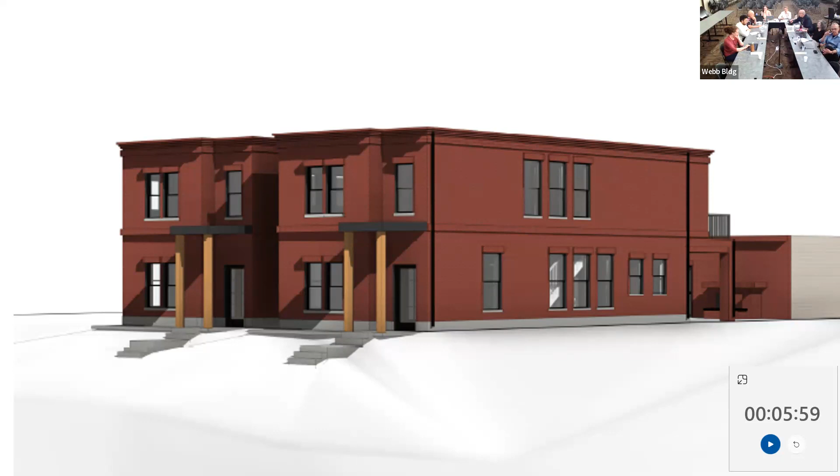So here, is you... that is actually not. Yeah, so you see the downspout that's from the top roof of the building, so essentially the drainage would come in and connect into that, but it's not a gutter along the fascia. Yeah, I see it, so I think that's a way to solve it, to bring it back through the building and tie to the other downspout somehow. But I think your profile is going to change that, it's going to get taller to accomplish that internally.

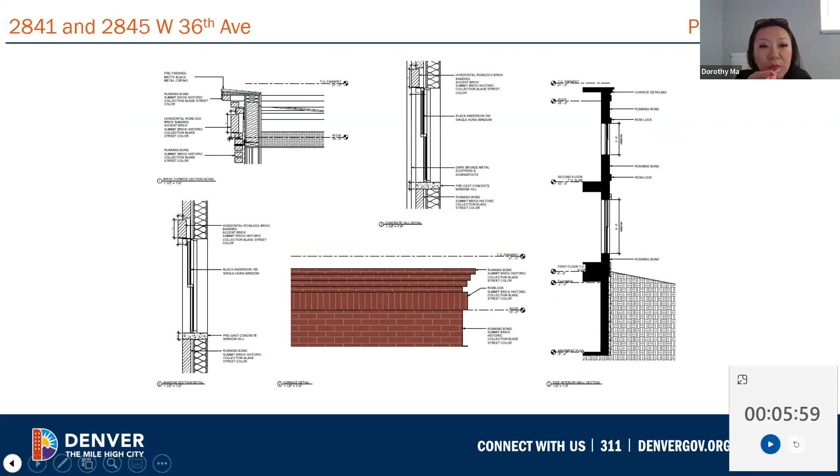It's a pretty low slope, and currently I think we have, what do we have, Abby, 9 inches? I think it's just over 10 total. How is that, is it 2x6, 2x8, 2x10, 2x12 framing out to the posts? Typically 2x8 is probably what we'd frame for those. I don't know how you do it in that narrow profile, but... I would think we'll discuss that as we go into deliberations. Yeah, and if you need us to provide an additional detail for that particular roof, we're happy to do so.

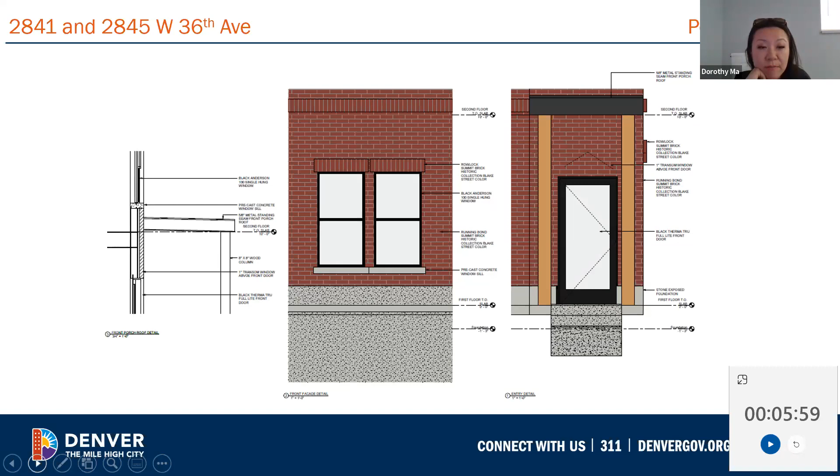Thank you, other questions for the applicants? No, doesn't look like it.